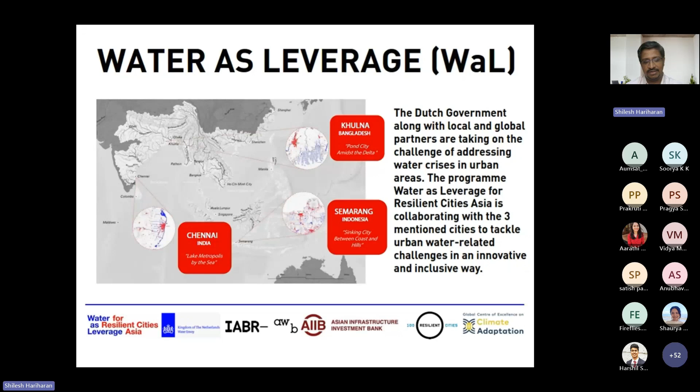So this came about as a competition called Water as Leverage in 2018, which as a collective we bid. I represent the architectural practice here in India, with OOZE architects and urbanists as the primary architectural practice in the Netherlands. So we collaborated and created a large consortium of experts who we thought would be able to look at a holistic solution for water. Now we won the bid. There were 2 teams that won the bid: one is City of Thousand Tanks and the other is RISE Chennai. And the objective was clear: how do you look at sustainable water management for Chennai? So the first thing we did was to understand what has actually gone wrong in Chennai, because if you look at 2015, we had a phenomenal amount of flooding.

2005 was a major rain event. We had phenomenal flooding in the city. 2015 was again a major rain event. We had the flooding. Most of the city was submerged. And you can see in 2018, we came so close to a D-Day where water scarcity became significantly rampant, and municipal supply systems were drying out. All the sources that the city gets drinking water and potable water from were drying up.

And this was the question that we started off with. What is the reason that a city which is flooded at one point, and in the next 2 years you see it's come close to a point where it's gone bone dry? So with this question, we wanted to understand holistically where the problem is.

So if we looked at rainfall data of Chennai, we get about 1,200 to 1,400, in bad years maybe 900 to 1,000 millimeters of rain. And if we capture the water that is falling in the urbanized area of the city, we have enough water. We have enough water falling on our footprint to serve the residents.

And if you look at the aquifer structure, a larger share of the city has a clay barrier and a sand barrier and a shallow aquifer. So it is possible for us to recharge and hold water as a part of the landscape and retrieve it sustainably. Far more than that, historically, this is a part of the world where you don't have any perennial source of water. So you don't have rivers, you don't have streams.

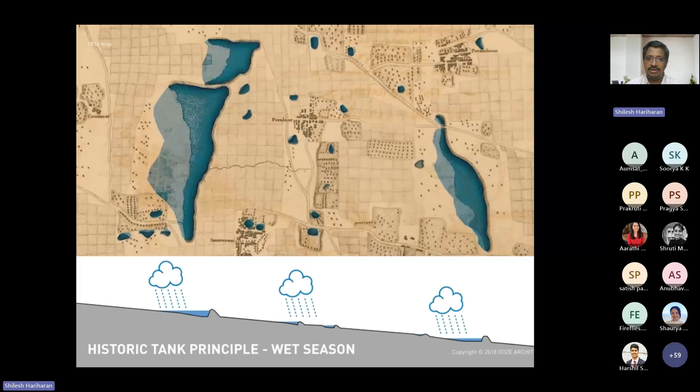So this ridge holds water during rain, and it stops water from running off as surface runoff, and then retains it as a part of the landscape. And it is all ingeniously connected through a network, which is called the system tanks or the Eri system, which passes the water like an ice tray from one to the other to the other.

So by the time you see water coming down to the marshlands, most of the fresh water is captured as a part of the landscape. And this water of significant volume is used throughout the year for irrigation, recharge into the aquifer, and sustainably taken up at the village level.

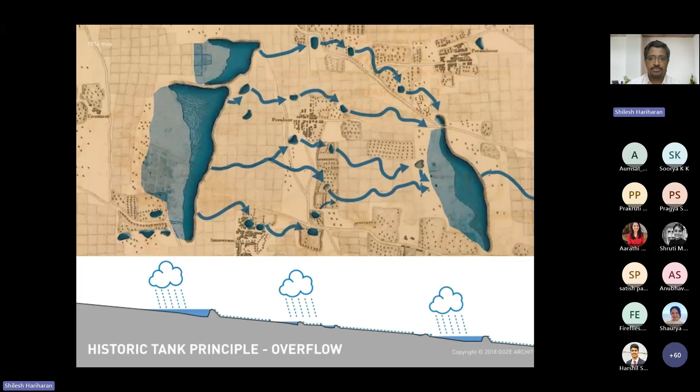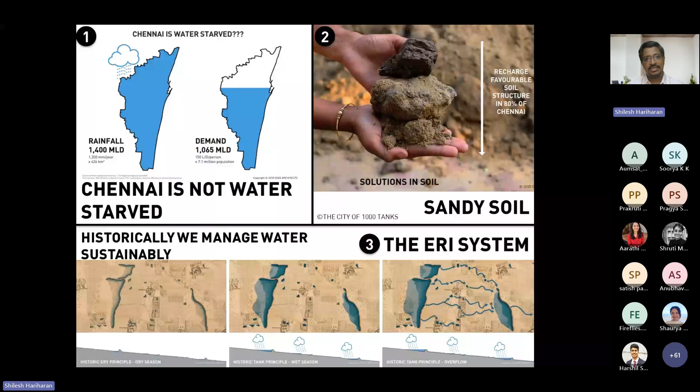Now, what we realized is, we get enough rains. We have a very conducive soil structure, at least in most parts of the city. We have a historic system that has been functioning for thousands of years. Now, where did it actually go wrong? Because this is a root. Then the question comes up: what has actually happened?

So the urbanization pattern in Chennai, these are all rough numbers. Through satellite analysis, GIS, we came to these numbers, but we can see a huge amount of impervious landscape that is being created as a part of the urbanization process. And the process of urbanization by itself is looked at as an extension.

And for Chennai, for instance, we get drinking water supply from as far away as 250 kilometers. So water is pumped from there, it's brought into the city. Most of the water is consumed, discarded, partially treated, partially untreated. It's all discarded through rivers, lakes, and into the sea. So this system becomes a transition zone where resources are consumed and waste is generated.

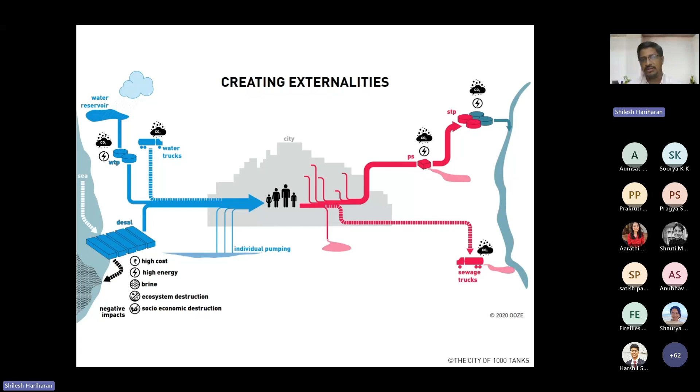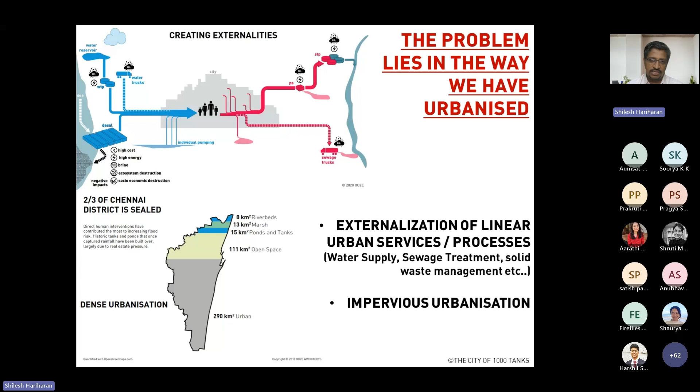These two systems we found fundamentally contradicting any natural philosophies, quite contradictory to any system that could coexist with nature. So this is where we thought, okay, the larger perspective of a linear process, a city which consumes resources and constantly generates waste, has to be relooked at from a nature-centric point of view, where every component, every leaf that falls down from the tree is a source of another cycle of activities, a source of another nutrient cycle, and then upscales itself into another natural system.

So there's no waste. It's just that its context constantly changes in the landscape, and its function constantly changes, its physicalities and its ability to adapt itself to the requirement changes, and natural systems reconsume it to the full extent. So how would it possibly be possible for us to look at urban centers in this form? And that's where we came up with this vision.

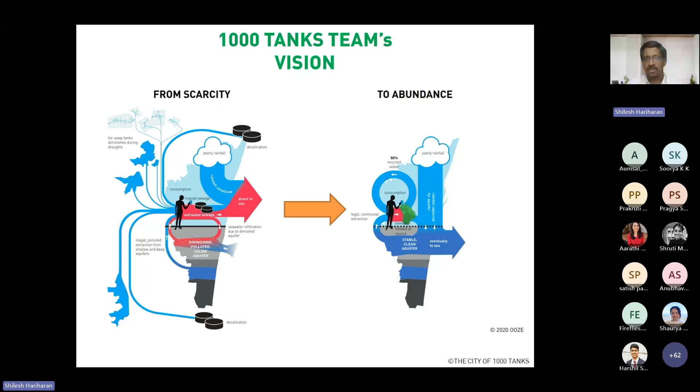So we wanted to see how we can take Chennai from a transitory, consumption-oriented, infrastructure-centric city to something that loops itself, something that balances itself, something that produces and turns its waste into an asset, and constantly finds ways to manage its systems in a decentralized way. And that's the larger model.

So we thought, okay, well, let's come up with a water balance model, because water is always a balance. What falls down, how much you retain, how much you use, how much you produce as waste, how much you reuse. So we said, okay, let's look at a balancing model for water. What do we capture? What do we treat? What do we recharge? And when we put all these things together, we must be able to achieve this holistic vision. And that's where we came up with all these set of tools.

Now, these tools are fundamentally measures that we thought would be able to integrate inside the urban landscape. And these were the nature-based solutions. And I will give you a larger context of the nature-based solutions, why we felt it was quite interesting, because nature does all the functions of cleaning, consumption of waste, and then transforming energy into various particles. But then it is also an integral unit which provides life, habitat, leisure, and all those things that make it a very holistic solution.

So nature-based solutions become an obvious part of any urban development, because this will be able to make our environments far more receptive to the requirements, and at the same time make it a place where life also thrives in all forms.

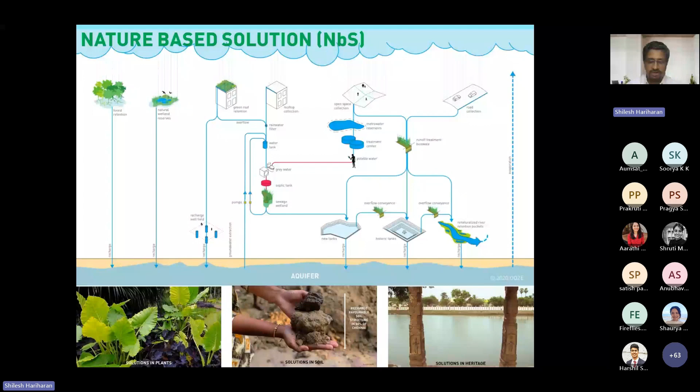So you see a list of measures. So we said we will restore historic tanks, we'll look at new tanks, we'll look at urban forestry, we will look at renaturalizing canals and rivers, we'll construct bioswales to capture, treat surface runoff and recharge into the ground, constructed wetlands for treating wastewater, look at solid waste management, because that's one fundamental key area, and also look at coming up with norms and conditions where we look at adaptive construction. So buildings being sensitive to the landscape and being a part of the capturing mechanism themselves. How can we come up with bylaws that can drive these kind of systems?

And we took up a couple of demonstrative projects, two visionary projects. They are visionary projects where we said, if it is done in this kind of a landscape in this place, it will cause such a large escalation of impact.

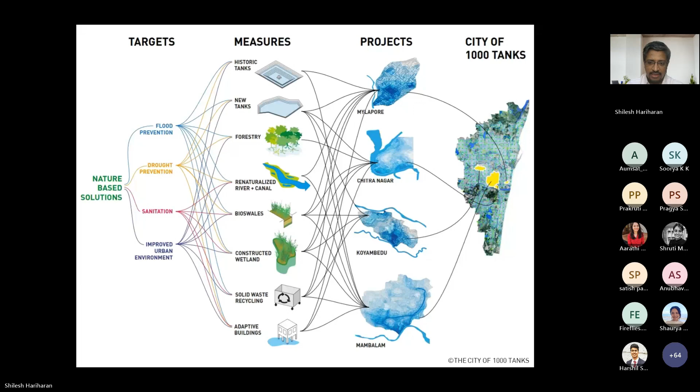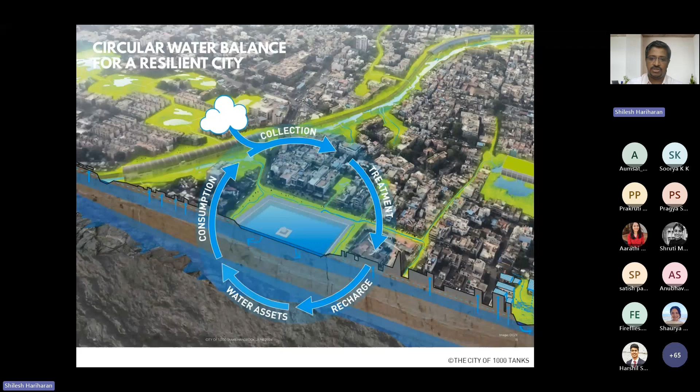But this is the motto. So you have collect, treat, recharge, water turns into an asset, and then you consume. The consumption again causes a treatment, and then collection, treatment, recharge. So it's a loop, the loop that we saw in the cyclic systems. And we saw this loop being decentralized and locally integrated inside the urban fabric could possibly transform the entire landscape of the city. So it could make it completely resilient, completely sensitive, and at the same time sensible for human needs, human social conditions also.

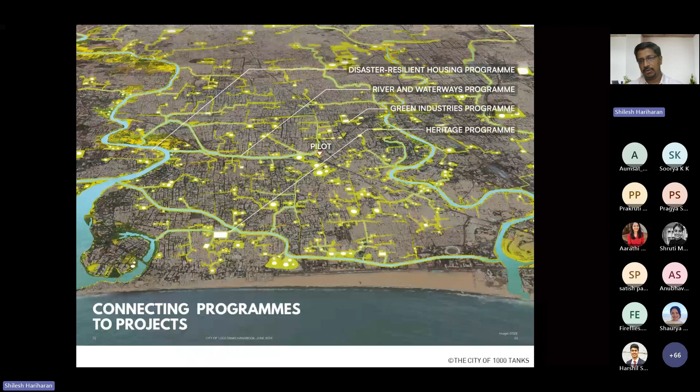But we came to a point where we had to demonstrate what we are saying. So we are talking about NbS, we are talking about all these measures, but tangible results, tangible measures had to be given. So we set out to do a pilot with the support of the Dutch government and the RVO, and through the network of the city resilience officer, Mr. Krish. So we reached out to the school.

This is the Little Flower Convent at the heart of the city. So you can actually see the coastline and the US consulate. It's the old part of the city. And this is a convent. It's about 90 years old. It was started by a Belgian missionary, and it gives education to children who are visually impaired and who have hearing disabilities. So we felt it was quite appropriate to do a pilot here, because it serves a very needy client. And we also saw the site mimic the conditions of the city.

So the photograph that you see on the left is what happens during summer. So this convent is about 90 years old. It's a large piece of land, and the city around it has urbanized. One of the processes of urbanization is that the levels of the functioning surfaces are constantly going up when you're doing roads, when you're backfilling and filling your property. So the surrounding areas around the convent have significantly gone up, making it a kind of a depression in the landscape.

And the municipal systems, they don't, so the invert levels of the sewage lines are going significantly lower. So you can see pressure of the pumped sewage coming and backflowing into the convent during the summer. And this is a photo that is taken on 2021 November 7th, when we had about 200 millimeter event in 24 hours and the entire campus was flooded. So they had to bring boats to save the visually challenged children.

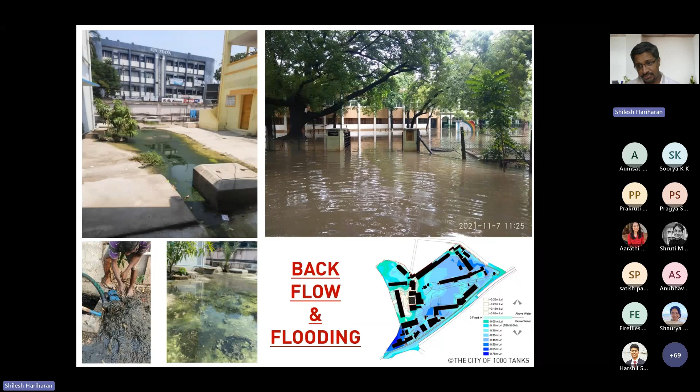So you see both the conditions. Just like the city, this mimics the condition where they had the issues during summer and they had water related issues during the rainy season as well. So we said, fine, let's try to have a solution where we address the wastewater, at the same time capture as much rainwater as possible. So we came up with this system.

Now, what I am going to explain is a bit technical, but I'll try to make it as simple as possible. So number one is the settler. The settler is nothing but a kind of a septic tank which captures all the sewage water through gravitational flow. The settler had to be set away from the installation because it had to be in the lowermost geography where we gravitationally collect all the waste coming from the blind hostel as well as the deaf students hostel.

So we collected that and we had the primary settlement happening, and then we treated the clarified water through pumps to the anaerobic reactor, which is number 2, the circular tank. The circular tank has 6 anaerobic compartments and an anaerobic digester, and water passes through all these in a vertical flow. And from there, we had 2 constructed wetlands connected in parallel. So the water from the anaerobic reactor is pumped into these 2 constructed wetlands, and the final treated water actually comes down to the storage tank at 4.

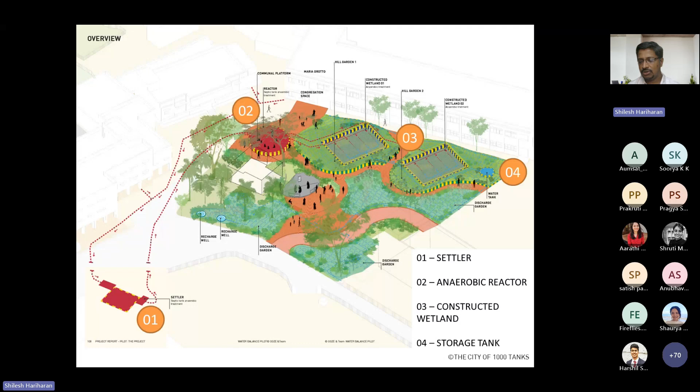So this is the settler. You can see it's set in a place at the end of the site where it collects. Then number 2 is the anaerobic reactor. It's a rectangular tank, but we made it as a circular tank, circular profile, because there is the kitchen of the school there. So we thought it will be a wonderful place where children can sit and gather and use it as a stage. And then the constructed wetlands, and then the water tank.

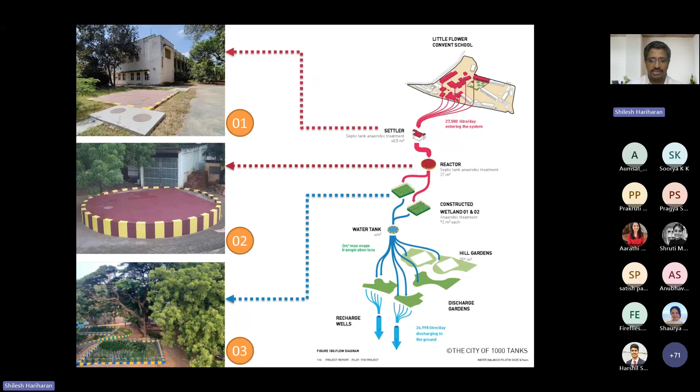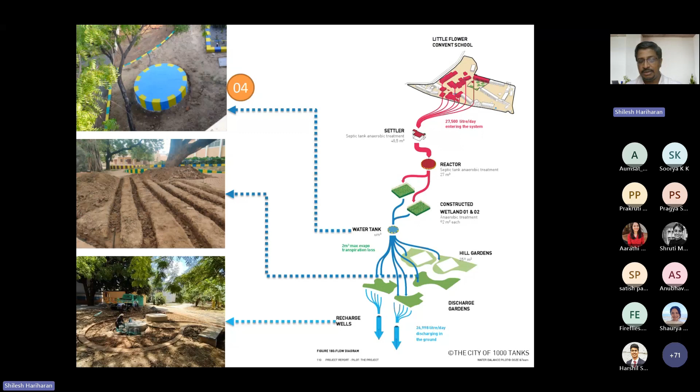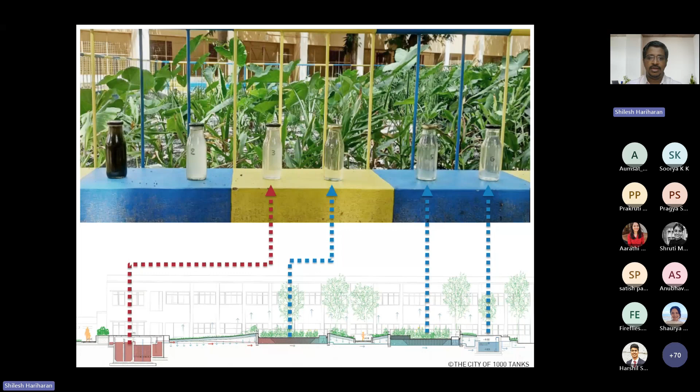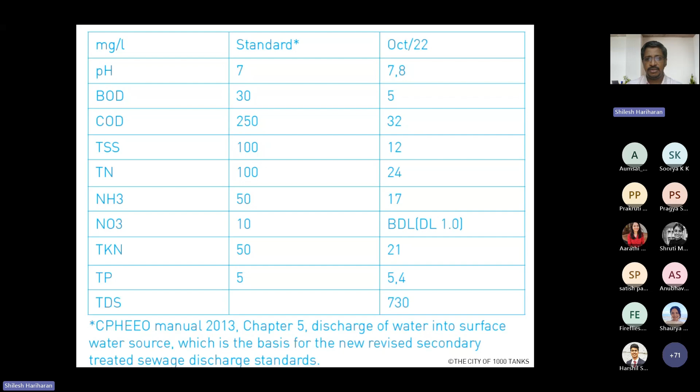And this is the treatment standards that we were able to achieve. So that is the raw sewage in 1 and 2, the clarified. And then you can see at 6 is the water that we took out from the tank. And this gives you a larger picture of the treatment that is just done through natural process. There are no active treatment systems per se here. And these are all the standards that we have achieved. So we had CPHEEO standards as the benchmark; this is again results from October. We have significantly improved on this because this was the first set of results that we took, and this is what we impacted.

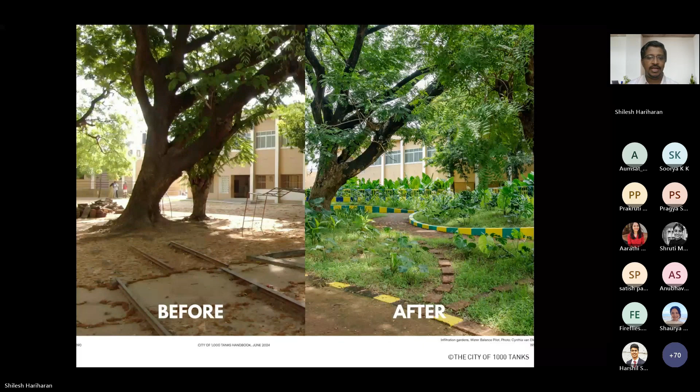So this was how this landscape was. So that was a hostel for the nuns, and we took this area because it was in the middle of everything, but then it didn't have much of a function or a purposefulness to it connecting the campus. We shifted it to this. Now it's a green lush zone, and we have such amount of life and activity happening here.

Because this is a large campus, there are these mongoose as a part of the landscape. Now they started moving into the constructed wetland. They are always around. It's a pleasure to see that we are sharing spaces with life forms of all sorts. And we have created an environment where everybody feels included, even children, even animals.

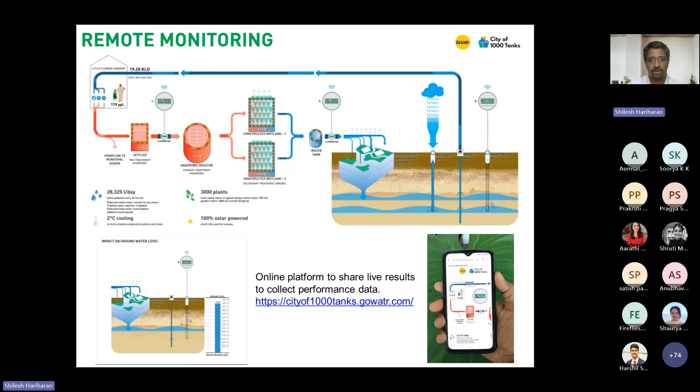So we also have a live monitoring system through which we are monitoring the wastewater that is coming into the system every single day, the amount of wastewater that gets treated, and the level of the aquifer in the recharge wells that we have. I actually forgot to mention the recharge wells. Okay, so we also did recharge wells in collaboration with IIT Madras.

IIT Madras came up with a unique way of doing these wells where we had a larger catchment tank, and we did a deeper borehole which goes about 75 feet, tapping into the confined aquifer. So there are two aquifers, the unconfined aquifer and the confined aquifer. So we created a deeper recharge well so that the effectiveness of the recharge structures improves. And we did them at strategic locations inside the campus, and they are producing good results in terms of capturing water and recharging it at a faster velocity than in a surface runoff condition.

Now that we have demonstrated the recharge wells, the constructed wetlands, and the swales integrated inside this project, we are seeing all these elements, as an expression of nature-based solutions, being transported to the larger scale. Scalability is something we are very much interested in, because at the end of the day, what we have done at LFC is an STP. We are treating about 27,000 liters of water every single day.

And we are doing it in such a way that it is right at the heart of the institution, where the sisters stay, where the kitchen is, where the Maria Grotto is, where everybody in the institution prays every single day. And this is right there. It's a part of that landscape. That's the greatest thing about nature-based systems. They can be integrated, even at the core. If you look at it, it's an STP. But the very way it is functioning, the very nature used inside it, makes it an environment which creates life and supports life to thrive.

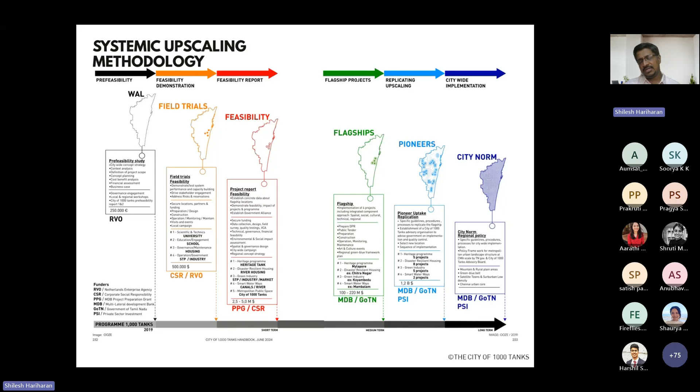So it is multifunctional. It is very much integrated as a part of the built environment, and it can be designed in any fragmented parts. So design, flexibility, freedom, accommodation, and making it an integral part of the built environment makes it a phenomenal solution for decentralized wastewater treatment. So what we are looking at is, what we have done at LFC, can we scale it up? Scale it up in all possible ways, to large systems, small systems, systems along the water body, systems inside institutions, systems that treat channels, canals, even rivers.

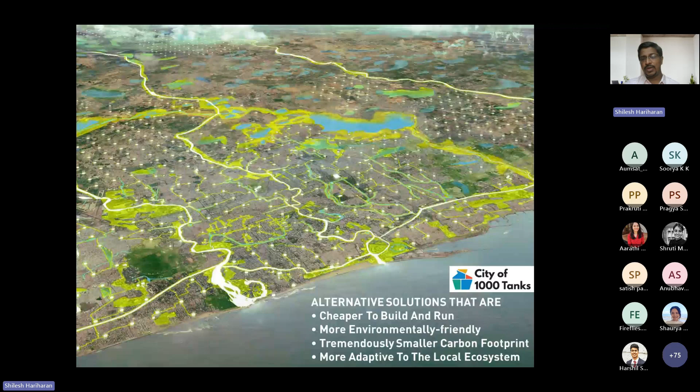And that's where we come to the larger vision that we are promoting now. We are in the process of applying for the Green Climate Fund. And this is the Mylapore Heritage Project. If you look at the temple tank, historically the temple tank is an inverted pyramid. The bottom of the temple tank in Mylapore is about 5 to 6 meters. Now, the aquifer in Mylapore is at 5 to 6 meters.

The temple tank cuts through the 5-meter clay barrier and actually exposes the natural aquifer at the bottom. And the temple tank is an inverted pyramid, as I said initially. So it funnels water at higher pressure at the bottom than at the top. So historically, temple tanks acted as a very fast recharge mechanism for settlements.

And because they are such important components of holding water and important components that provide water for the wells of the surrounding area, it was given that holiness. So it was made an integral part of the temple. It was prescribed, designed in such a way that there's a holy reverence to it, so that we don't abuse it and we make it an integral part of society. So that's what I come back to.

Thousands of years we have been able to manage water. I think in these densities, we have to relook at how we manage water and come up with new systems that find the old essence, but in a new form. So this is Mylapore tank, and it's about 130 million liters capacity. And this is another tank in the vicinity. It's about 36 million liters capacity.

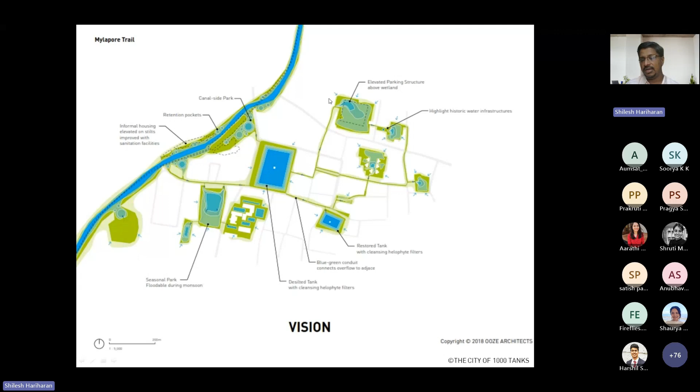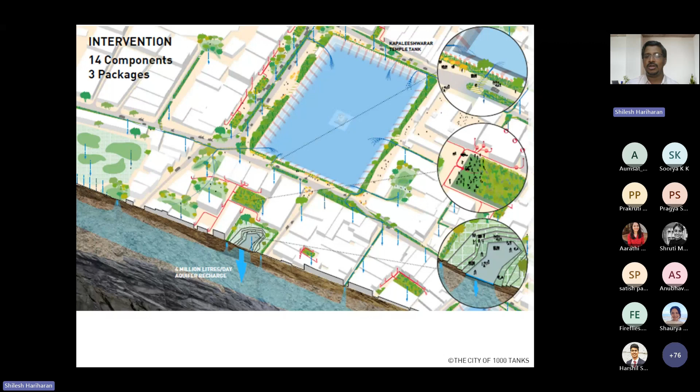And this is Buckingham Canal, and you have a large set of open spaces on both sides of Buckingham Canal as well. So there is space. There is a possibility that we can create green infrastructure that can receptively hold water and not let it run away as a flash flood. And we are envisioning Mylapore to be something like this, that is quite sensitive to water, green, at the same time porous, it captures water in all its essence, it recharges it, and at the same time renews the cultural value of a temple tank.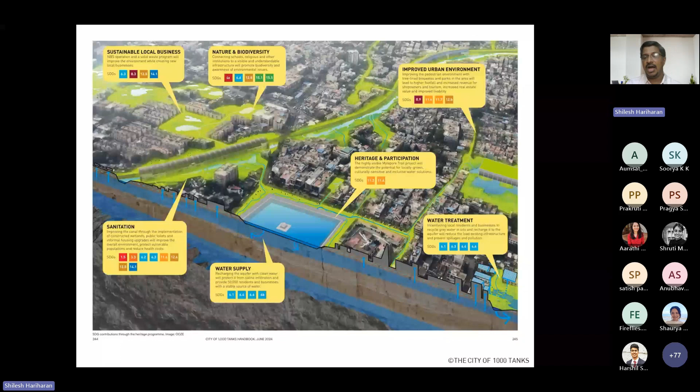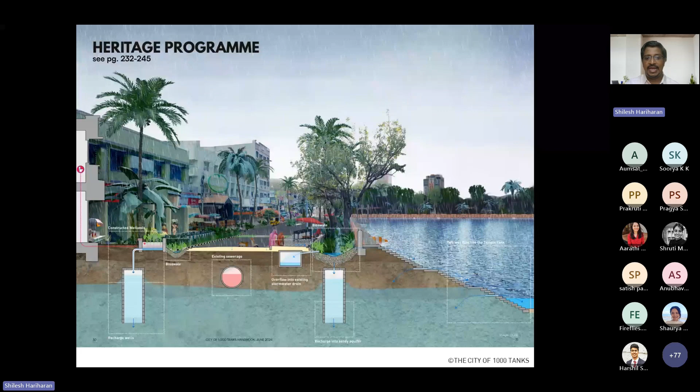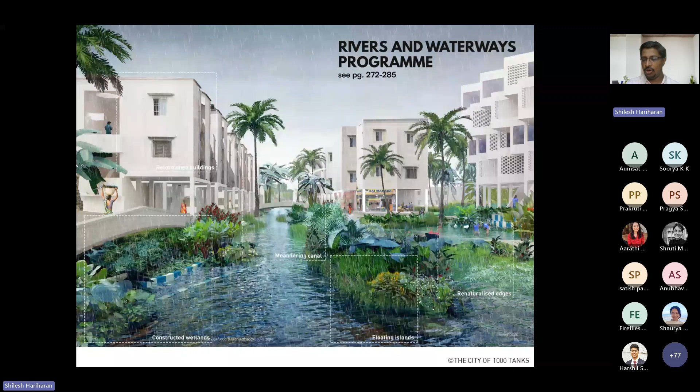And these are all the things that show how we visualize Mylapore could be. It could be so integrated, it still could hold water, it still could be porous, it still could be the existing physical structure as it is, but still be a completely different environment, a water receptive environment altogether. And yeah, we see this as an expansion across the landscape. River sensitive programs where housing could be designed in such a way that they also find a sensible way to manage water. And this is what we see.

Mylapore is one. We already know there are about 53 historic tanks. If we benchmark this and make it a design opportunity for all these tanks, we have a significant impact along the landscape. And that's where the name comes from, 1,000 tanks. So decentralized systems integrated inside the urban landscape and scaled to whatever possible extent start creating a dynamic making the city far more receptive, far more porous, far more water resilient, far more drought resilient as well.

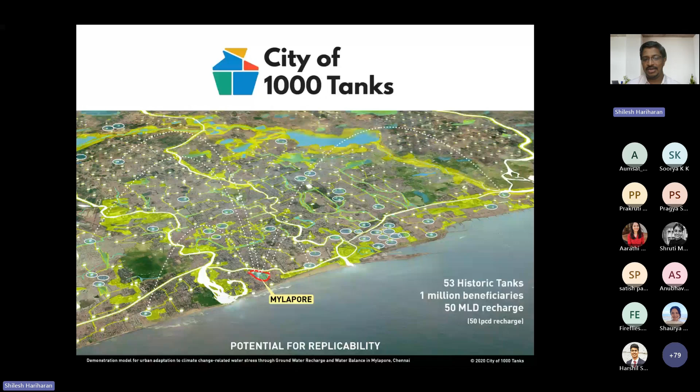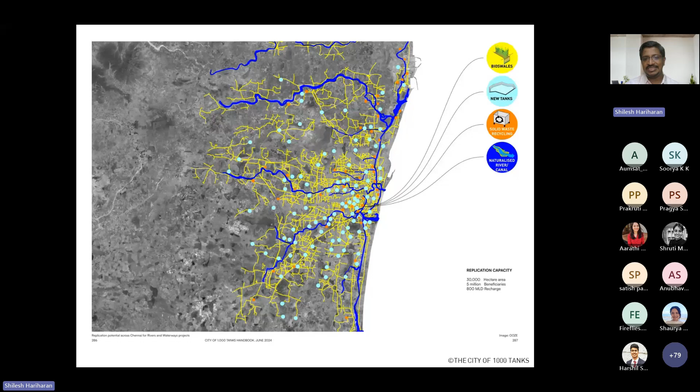And we have all these programs that we are thinking about: the canals, renaturalization of canals, how do we create new tanks, how do we create new detention parks in the OSRs, open space reservation spaces, or in parks, where during the summer they actually function as social hubs. During rain, they become detention zones where they stop surface runoff or the flash floods that happen during rainy season. So this has the capacity to completely transform Chennai and make it phenomenally water resilient. So the idea is we have centralized water treatment systems which are functioning today. Try to augment them with decentralized wastewater treatment systems and capture mechanisms.

So you slowly start plugging out every compound at a time, every institution at a time, every building at a time from the centralized system. So the urban densities which are significantly increasing can also be managed and can also be resolved as a closed loop system.

So we are looking at systems which work hand in hand with the existing infrastructure, but at the same time, by plugging each and every individual component out of the centralized system, we are also increasing the resilience of the centralized system. And at the same time, we are increasing the resilience of the whole urban fabric as well.

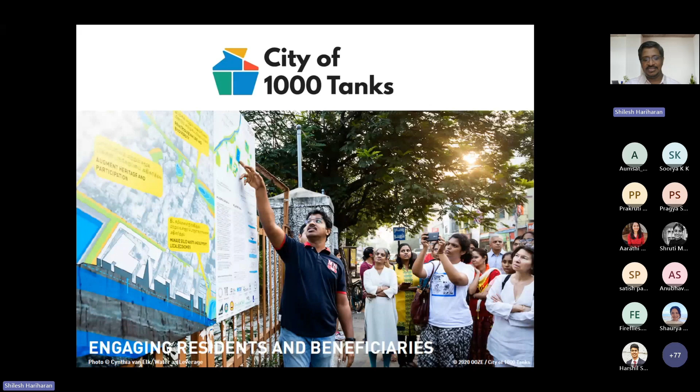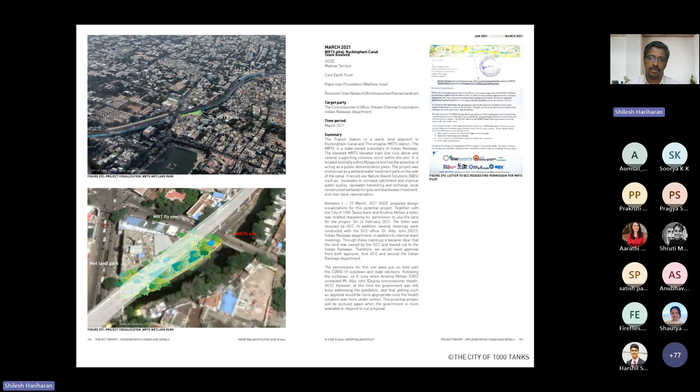And this is us. We have been on streets, we have been on all possible venues explaining what we are thinking. And this is our proposal for the GCF, which has been approved by the government of Tamil Nadu. And it is somewhere in the lobbies of the national government where we are trying to see how best we can fast forward it being projected as a project representing the government of India to GCF funding.

And we have also been working with a lot of children, because we also understand that their visualization of water, their ability to understand water, their ability to work with water has a significant impact on what is going to happen to the cities of the future, even Chennai. So we had this water ambassador program where we reached out to so many children who are living predominantly in low-lying areas, informal settlements right next to the water body, who see the brunt impact of the excess of water and the non-availability of water. So creating awareness over there.

We have been in innumerable workshops here in Singapore, across all parts in Delhi and other areas where we have been speaking the same thing. No, it is possible for us to envision a new urban fabric where water becomes an asset and an integral part of how we think and how we work.